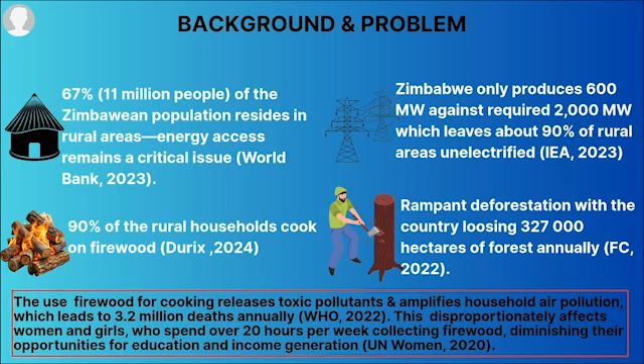Additionally, 90% of the rural households rely on firewood for cooking, driving deforestation and exposing families to deadly indoor air pollution. Women and girls are especially impacted, spending over 20 hours weekly collecting firewood, which limits education and economic opportunities. Given these challenges, rural communities urgently need clean and safe cooking energy, reliable lighting, safe nearby water sources, reliable charging infrastructure, internet connectivity, and electrified education and healthcare facilities.

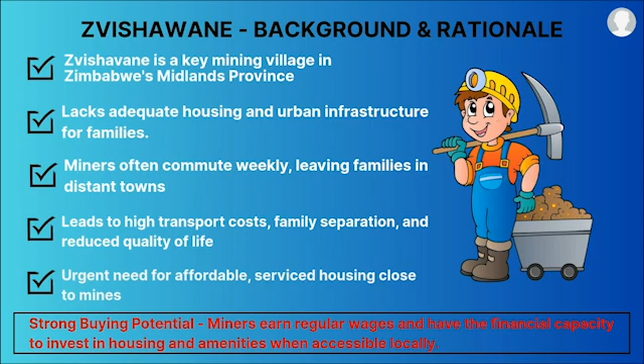We chose Zvishavane in the Midlands province for our pilot community. It's a major mining hub, but miners often live far from the mines due to inadequate local housing. They commute weekly, which increases living costs and separates them from their families. Zvishavane also offers affordable land, and miners have the financial capacity to invest in nearby housing if basic infrastructure and amenities are provided. We assessed renewable energy options.

Wind's potential is too low, with only 145 watts per square meter out of 1,000 watts per square meter. However, solar's potential is extremely high, offering 2,000 kilowatt hours out of the 2,400 kilowatt hours maximum, making solar the ideal choice for an off-grid energy solution. Thus, as a solution, we are proposing a 2,000 household solar-powered residential community to house mining families close to their working places. Each five-room unit will support a family of four and provide hydrogen cookstoves, solar-powered lighting, centralized water supply, shared device charging, Starlink Wi-Fi, and electrified clinics and schools.

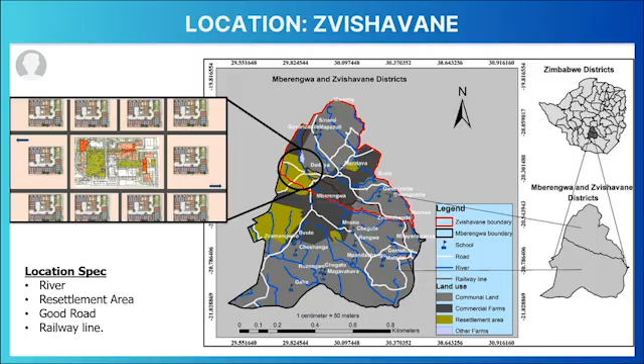Now we move on to the design. The snippet shows the exact location of Zvishavane on the Zimbabwean map, chosen for its very good road network as well as access to a river. On the left, we have the housing clusters with 200 housing units per cluster, forming 10 clusters, giving us 2,000 housing units. And at the center we have the Rozvi University General Hospital and Rozvi Community University. This is an overview of the Rozvi community with the hospital and university at the center. Then we have the housing clusters, all clustering around a laptop charging station as well as a shared backup borehole per 200 households. And that's a picture of a housing unit.

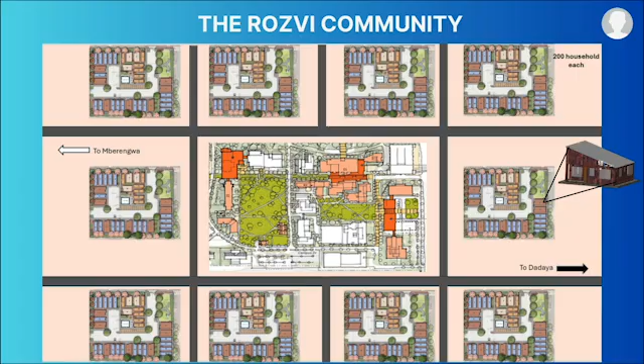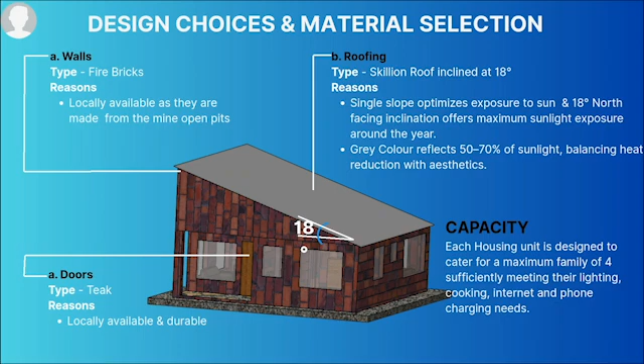This is our standardized floor plan, which includes 2 bedrooms, a kitchen, sitting room, study, and bathroom, fully designed for functionality, privacy, and comfort. And this is an overview of a housing unit. We prioritized locally sourced sustainable materials, whilst also enhancing efficiency, durability, and local relevance. For our materials, we chose skillion roofing at 18 degrees north facing for optimal solar exposure. We also chose fire bricks for walls because they're locally sourced from mine pits, and teak doors, which are durable and widely available in the region. And this is a detailed model of a housing unit with the required solar panels mounted on it.

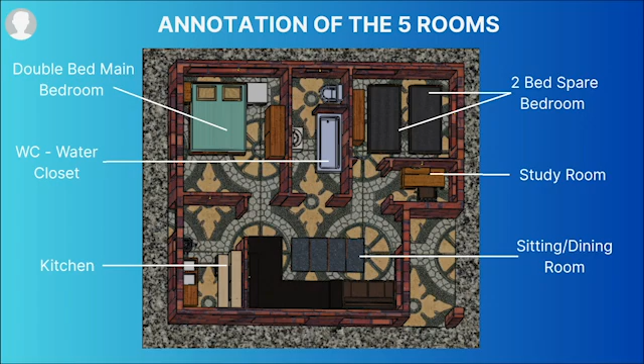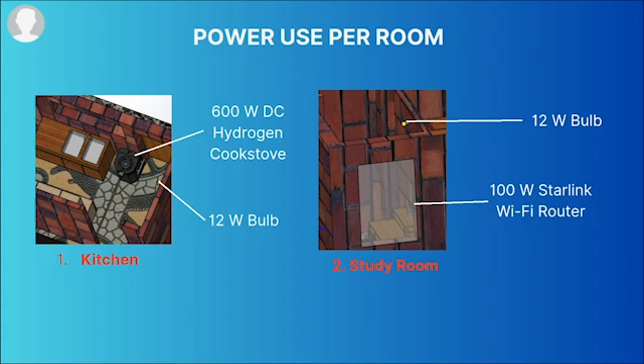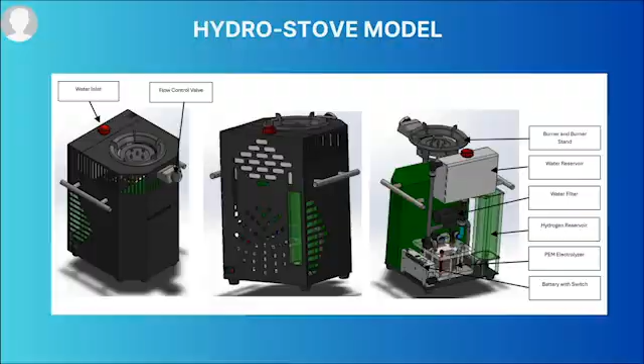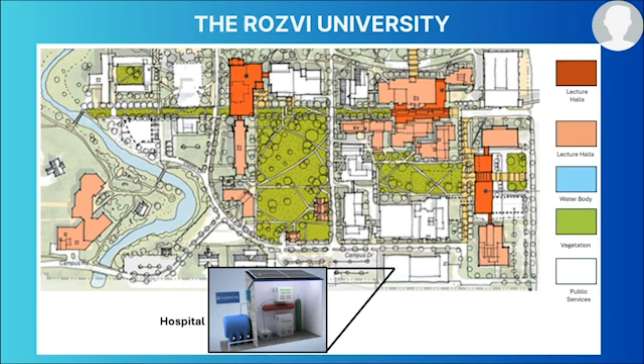Here is our working hydrogen-powered cook stove prototype that we built, central to delivering clean, smoke-free cooking for every household in the Rozvi community. At the heart of the community is a local university, the Rozvi State University, aimed at building human capital and serving the growing needs of the community. And within the university, we have the Rozvi University General Hospital. It is designed to be fully independent in its power needs, fully powered by solar with a backup wind turbine, a 923-watt turbine that we designed to cater for its needs during prolonged periods of low sunshine.

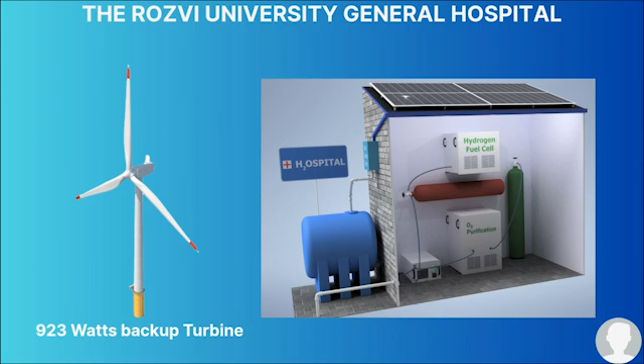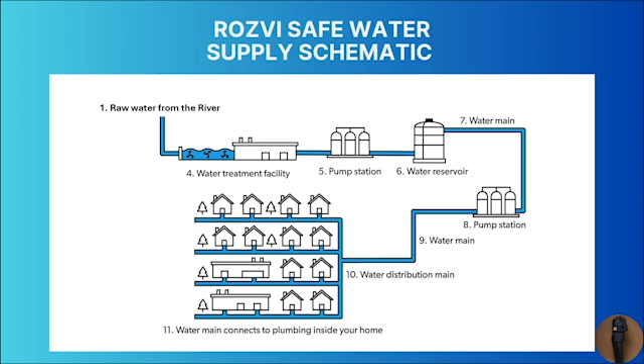Okay, so for our water supply, it comes from the river, which is located around the university, and then it passes through the water treatment facility, and then it goes through the water distribution, and then finally it gets to our community for usage.

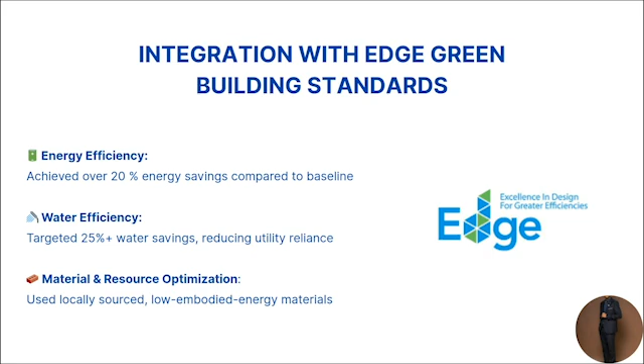So for each household, we wanted it to be a sustainable and green building. So we had to integrate it with the EDGE Green Building Standards. So we had three main factors to consider. The first one is energy efficiency. So we wanted to achieve over 20% energy savings compared to the baseline. We also wanted to achieve over 25% of water savings, which will reduce utility reliance. And finally, we also wanted to optimize our materials and resources that we would use in making our buildings.

So as for the building data, the whole house had about 2 bedrooms, and the total community size is about 2,000 homes. So each house averaged 63.75 meters squared, and the building cost, as per Zimbabwean standard, is about 130,000 Zimbabwean dollars, which amounts to around $9,000 United States. And it is estimated as a selling price of about 180,000 Zimbabwean dollars.

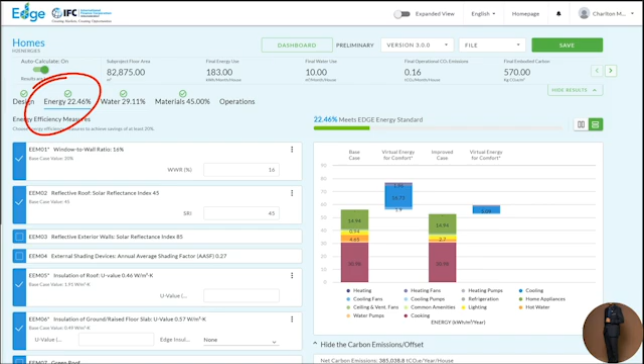So in terms of energy, we conserved about 22.46% more than an average house in Zvishavane. And this was due to different energy efficiency measures, such as an optimum window to wall ratio of about 16%, a reflective roof, which had a solar reflective index of 45%, and an insulation of roof of a U value of about 0.46. So this met the EDGE standard, which actually expects us to be about 20% better than a normal household in a community.

In terms of water usage, we reached about 30% beyond a normal household. And this was due to different water efficiency measures such as a water efficient shower head, which had a flow rate of 6 liters per minute, and the use of a bathtub with no hot water. We also used water efficient faucets for all bathrooms with a flow rate of 2 liters per minute, as well as water efficient closets for all bathrooms with 6 liters volume of flush and 3 liters for small volumes of flush.

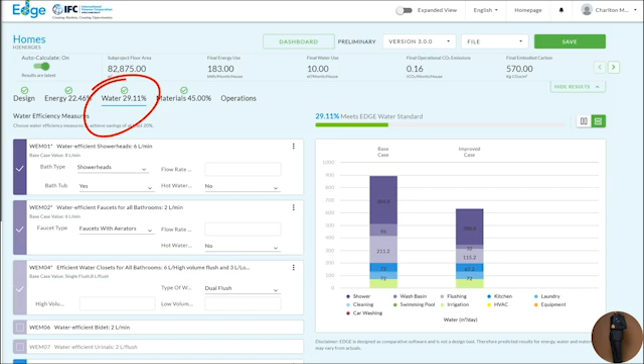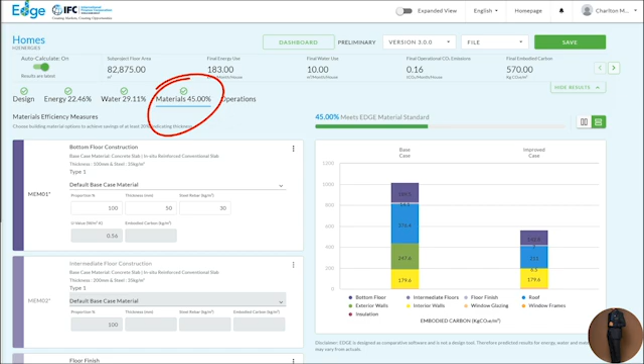With building materials, we actually achieved approximately 45% of the EDGE standard because we used efficient materials which reduce the embodied carbon in these materials.

So, in a nutshell, our project has a floor area of about 82,875 meters squared, and this accounts for all the 2,000 houses. And our final energy use based on EDGE is about 183 kilowatt-hours per month per house, and our final water use is 10 cubic meters per month per house, and final operational carbon emissions is around 0.16, and the final embodied carbon is 570, which are considerably small compared to a standard house in Zvishavane, which is a mining area.

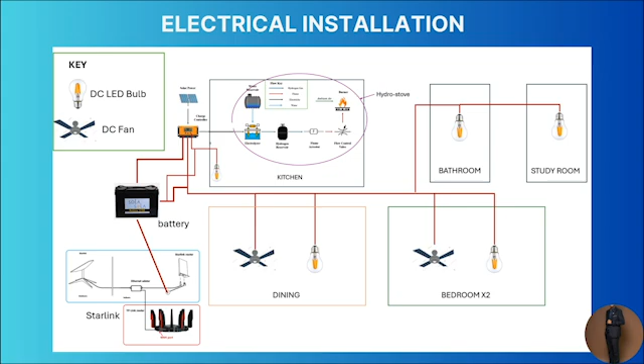So as to how our electricals are connected, our key major supply is a solar panel, from which, through the charge controller, we get the power that will power our hydrogen cook stove. We also have the power that will power each light in each room, as well as a DC fan. And we also have a battery for use in the evening where there's no sunshine. And from this, we also take the power for our Starlink, which will be our main internet connection.

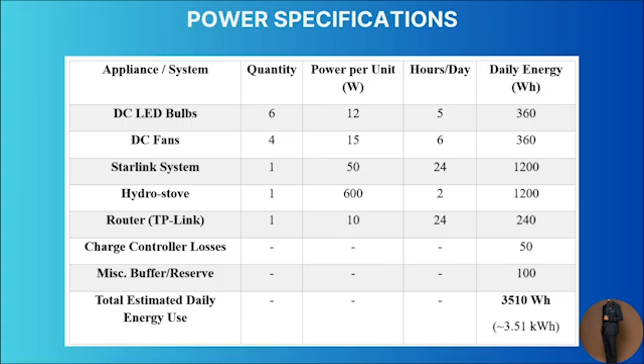So as for the power specifications of these electrical elements, we are going to use a DC LED bulb for our lighting, and each has a power rating of 12 watts per unit. And then we're also going to use DC fans with 15 watts per unit, and also a Starlink system that has a power of 50 watts each. And then our hydro stove, which is going to take much power, is going to get about 600 watts because it's going to be breaking water into hydrogen and oxygen, which requires a lot of energy. And then we also have a router, which will need about 10 watts per unit. So in total, we're gonna need about 3.5 kilowatt-hours of energy for these electrical components.

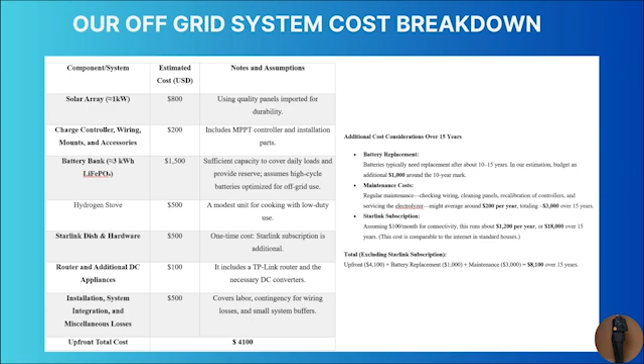So a standard household in Zimbabwe has an initial grid connection and installation of about $2,000 and a monthly electric bill of $150 per month. And because of power cuts, we actually need a backup generator and installation, which costs another $2,000, and fuel and maintenance for that generator of around $200 per month. And in total, for the same 15 years, the cost for an on-grid Zim house is about $67,000, which is far more than the 8,000 that I just presented for our household community in the last slide.

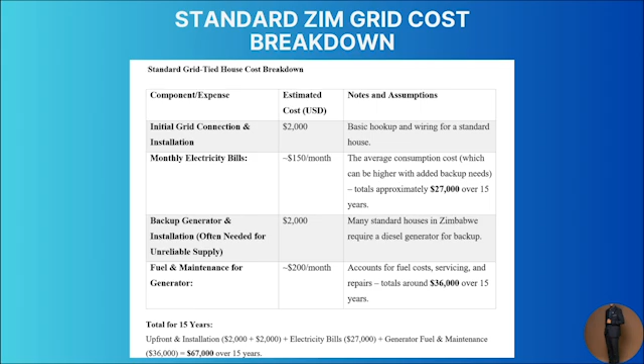So, in summary, our project provides affordable modern housing in rural areas with clean energy and water access, internet access, healthcare, as well as education. It shines as a sustainable and replicable model for rural development.